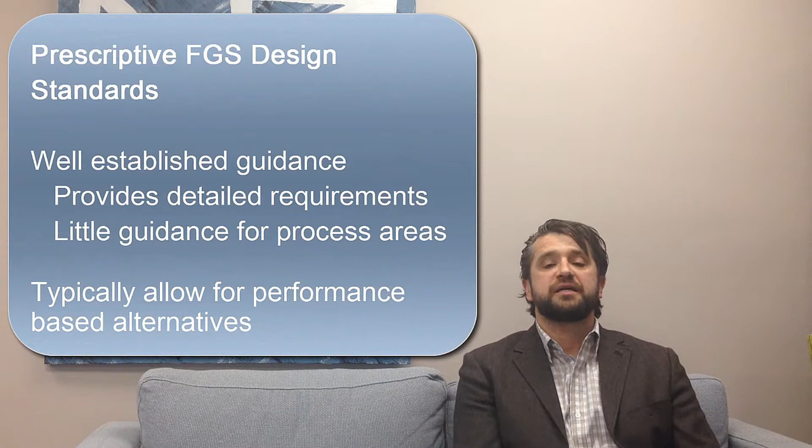But if you look at the prescriptive standards, even though they are prescriptive, they usually allow for the use of performance-based alternatives where appropriate. And of course, an open air chemical processing facility would be an area where it would be appropriate to use these measures instead of trying to apply the occupied building techniques that are detailed in NFPA 72 or EN 54. These standards, as I've mentioned, are generally not going to be specific to chemical processing facilities.

Performance-based standards, as I've already intimated, rely on an assessment of risk to develop performance targets, and those performance targets are typically going to be quantitative in nature. Historically, there have been no detailed standards for gas detection or fire detection with respect to placing detectors for open air chemical processes or oil and gas refining facilities. We've typically relied very much on expert judgment and rules of thumb to perform detector placement.

With the advent of the ISA TR84.00.07 technical report, industry and the experts on the ISA 84 working group have provided more detailed guidance for the design of fire and gas systems, and this design is going to be in accordance with the principles of the ISA 84 standard, or internationally the IEC 61511 standard.

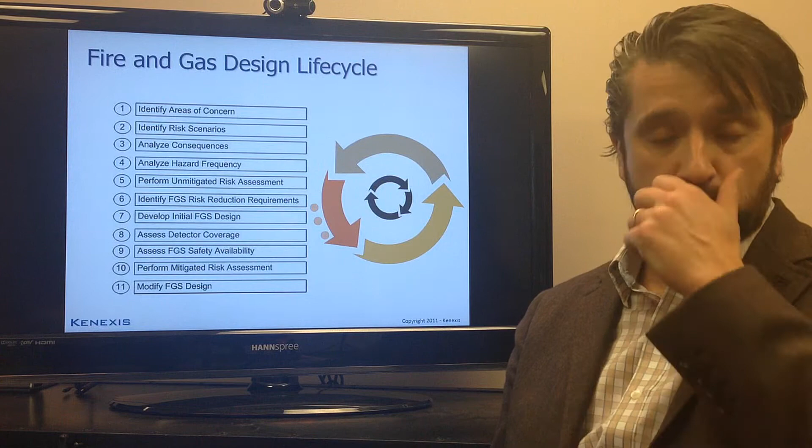What you see here is the fire and gas design lifecycle as it is presented in the ISA 84.00.07 technical report. You'll see that there are 11 stages in this safety lifecycle. And for those of you that are familiar with quantitative risk analysis methods, you'll see that it's very similar to what you would do in a QRA. This is not by accident, this is by design.

Myself and the other members of Working Group 7 of ISA 84's panel that developed this technical report had some knowledge, some grounding in how to perform quantitative risk analyses. And when we were tasked with the problem of how do you design a fire and gas system using performance-based methods, we fell back on what we were familiar with and what we knew, which is a full quantitative risk analysis.

Now, that being said, full QRA methods can, and in some cases should be used during performance-based FGS design, but most operating companies use more qualitative or semi-quantitative approaches similar to the level of effort of a LOPA, which we will get into as we spend more time discussing this topic.

So looking at the life cycle, we're going to begin by identifying the areas of concern. What are the leak sources? Where can leaks occur from? And those leaks can then ultimately result in fires. Then for each leak source, we're going to identify the risk scenarios, whether it's gas dispersion, toxic gas dispersion, flash fires, jet fires, pool fires. All of those different scenarios are going to be a function of the type of material being released.

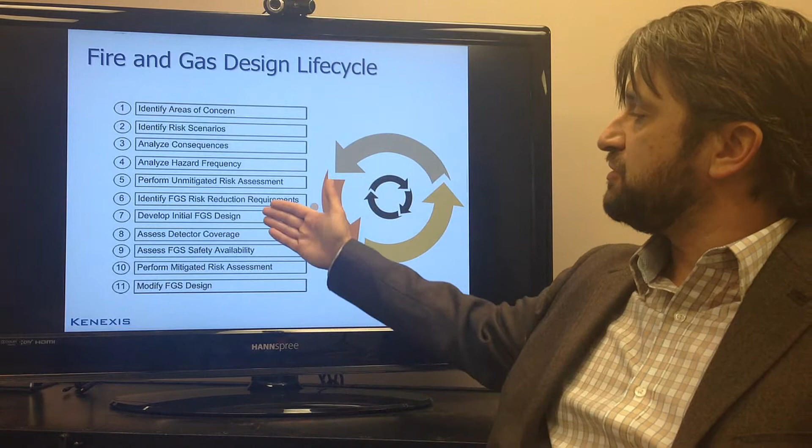So we're going to actually calculate what fraction of area or scenarios the existing or the proposed gas detection array or fire detection array can actually see, and then we'll calculate the safety availability using similar methods to ISA 84 technical report 84.00.02 that discuss calculation of probability of failure on demand. And using that information, we'll be able to perform a mitigated risk assessment, or what is the risk considering the beneficial effect of the fire and gas detection system.

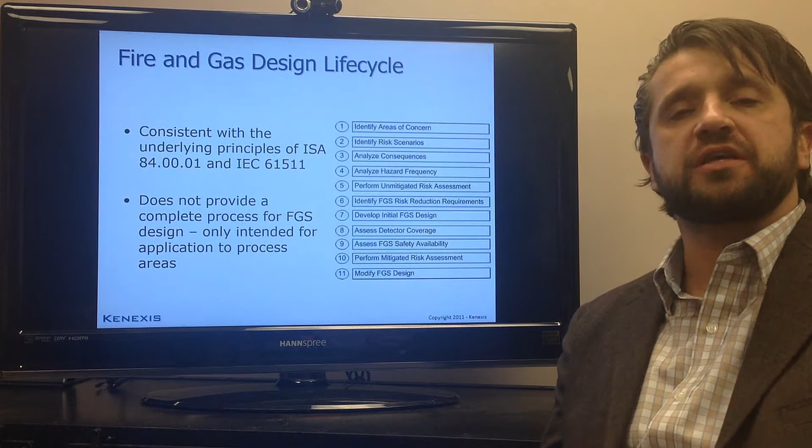Using the results of the detector coverage assessment and the safety availability analysis, we'll be able to perform a mitigated risk assessment here. Step 10. With the mitigated risk assessment, what we're doing is calculating the overall risk of the facility considering the beneficial effect of the fire and gas system.

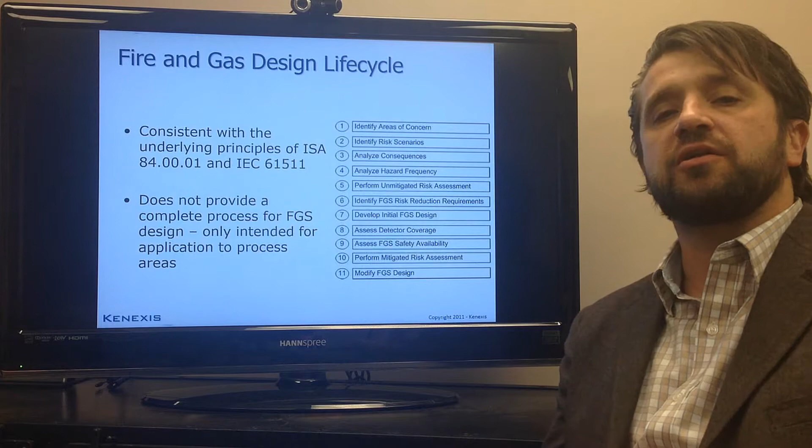If that risk is tolerable, then the design that we came up with is adequate. If that design does not achieve tolerable risk, then we're going to need to modify the fire and gas system design in an iterative fashion until it does achieve the tolerable risk level.

Now, the workflow that you would use for a fire and gas system design is going to be slightly different than the life cycle that was laid out in the standard. As I mentioned, when we first wrote the first version of the standard, performance-based fire and gas system design really was not done yet. It was not very prevalent.

There are several triggers that would cause you to do the analysis to determine whether or not I need a fire and gas system. After that, we're going to develop a fire and gas system philosophy. Now, that doesn't happen for every project. It's usually something that occurs kind of at the corporate level or at the plant level one time before any project work is undertaken. Now, on a project-to-project basis, where we're really going to start is the zone definition.

As I've mentioned, fire and gas system philosophy development is something that's going to occur once. It's not going to occur for every project, and it is going to occur more at the corporate level, the higher level, than down at the plants or for a specific project. This is important because you want to make sure that your fire and gas system design is going to be consistent from plant to plant to plant. A design changing different alarm colors or alarm horn sounds for different process areas within the same facility is not only counterproductive, it can actually be quite dangerous. So you're going to want to make sure that a lot of this information is going to be standardized.

So again, the philosophy development is something that occurs early on in the process, and it's going to be based on the risk tolerance criteria and HSE philosophy of your facility or of your corporation. And when you finish up with your fire and gas system philosophy, you're going to end up with a philosophy document and several procedures that you're going to use to implement fire and gas system projects.

A corporate fire and gas system philosophy will have many elements. And these elements are basically going to be broken into two categories. The first category being standardized methods, and the second category being standardized design heuristics or design procedures, rules of thumb. With respect to the standardized methods, the methods are going to relate to what are the processes and procedures that you're going to use to assess FGS requirements.

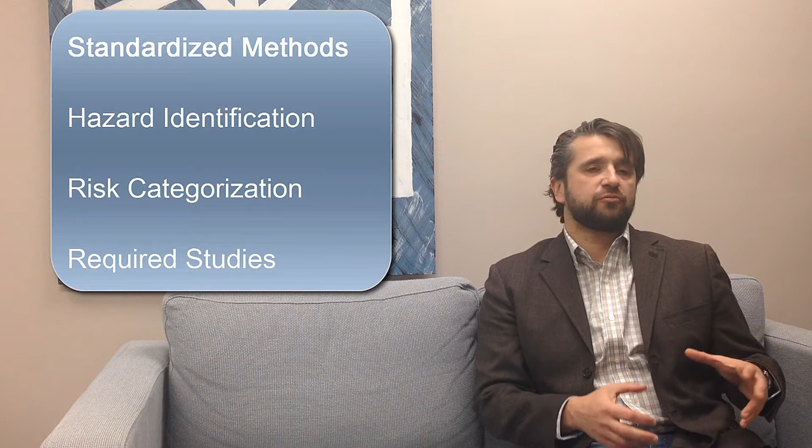So there will be criteria for how do you identify hazards, which hazards are present that you need to design for. There will be criteria for how you categorize your risks. So the level of risk associated with a high pressure gas compression unit is going to be higher than the risk level for atmospheric diesel storage, for instance. So procedures to determine which risks are higher and require more safeguarding. And then there will also be requirements for what type of safety analysis you're going to perform and what are the actual studies that need to be performed and how are those studies going to be executed.

With respect to design heuristics, these are going to be criteria that you design your system to. So there will be criteria for how do you do zone definition and how do you do grading. How do you assign performance targets to your fire and gas system equipment?

There will be criteria for determining what type of detectors do you use. When do you use UV versus IR versus triple IR versus CCTV technology? There will be criteria for setting what the alarms are. So when do you alarm? Low alarms, high alarms, what are the settings for those alarms?

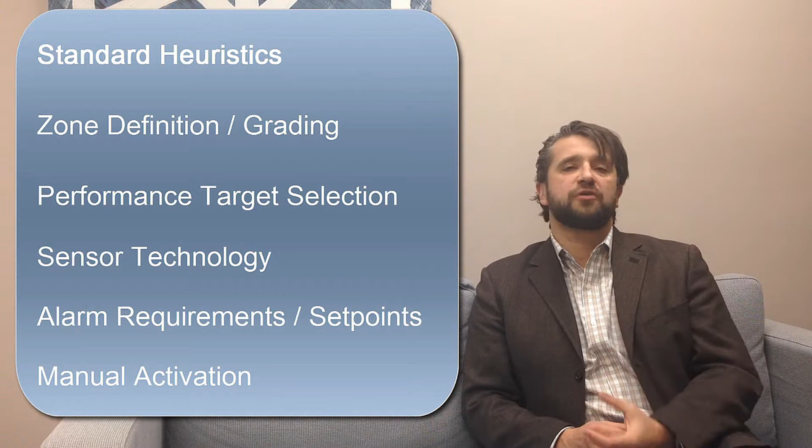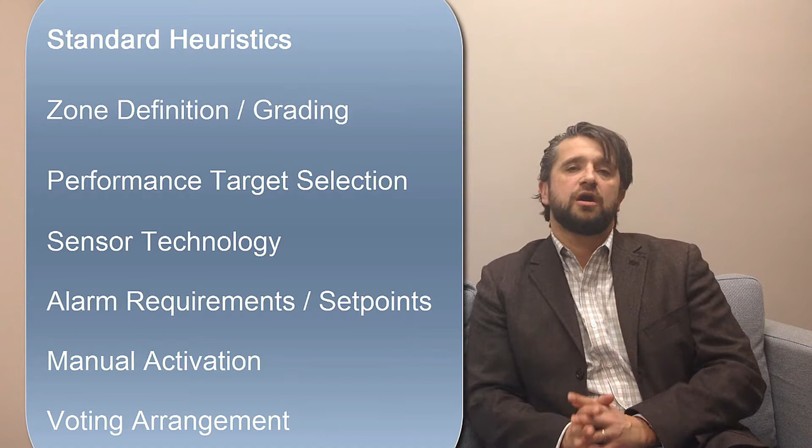There will be requirements for manual activation. Where do you put your MACs, your manual alarm call points? How many do you need in a certain location? There will be requirements related to detector voting and how that voting is impacted with respect to alarming and also with respect to executive actions being taken as a result of activation of fire and gas detection equipment.

And finally, there will also be criteria for set point selection. So there will be different set points typically for low alarms, for high alarms, or high-high would be more technically correct, even though the industry jargon generally says low and high alarms. And then also even higher alarms or different alarms that indicate that executive actions need to be taken if that is going to be part of your fire and gas system design.

All of this information is something that needs to be decided upon and agreed upon ahead of time by all of the stakeholders in the fire and gas system, from operations to instrumentation and control to the safety department. After you've completed your FGS philosophy documentation, you should have a set of several procedures that you're going to be able to use for designing your FGS.

Some of the important ones are going to include procedures for hazard identification. So what tasks are you going to do to identify where there are hazards and what types of hazards are present in any particular zone? There will be procedures for zone definition, defining different areas as zones, and also grading, or the risk analysis process that you're going to use to determine what is the criticality level that is going to then result in performance targets for those different zones.

Performance target selection, again, detailed procedures on how do I determine what is the coverage and safety availability that's going to be required for a certain zone. And then you're also going to need procedures for how do you quantitatively verify that you've achieved the performance targets that were specified in the previous step in the FGS safety lifecycle.

The next step in the FGS design lifecycle is the step of zone definition. When we're going to define zones, we're going to want to start with documentation about the facility. So things like process flow diagrams, piping and instrumentation diagrams, plot plans. Plot and deck plans are critical because this is a geographic exercise, so we need a geographic description of the facility, and also other documentation like cause and effect diagrams if they're already available.

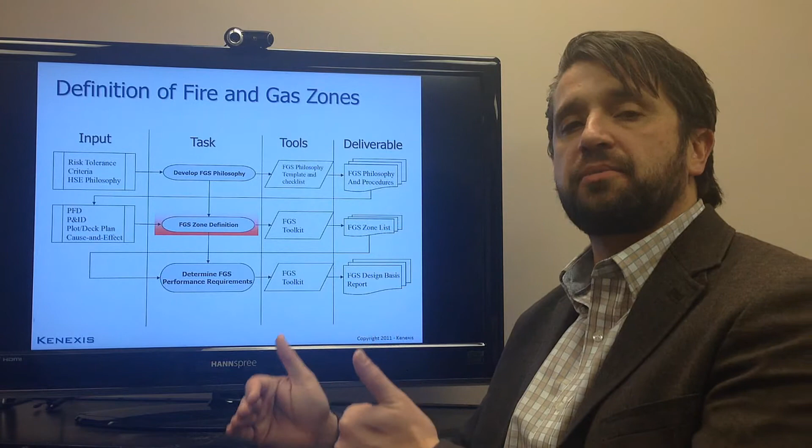We're then going to use a toolkit process and end up at the end of this zone definition step with an FGS zone list. And that list of zones is what we're going to use for each of the subsequent steps in the project to determine what the requirements are for each individual zone. Zone definition is an important part of the FGS safety lifecycle. The zones are going to be kind of equivalent to safety instrumented functions in safety instrumented system design. They're the basic unit upon which risk analysis is performed.

There are several different types of zones, and depending on what the zone is, that will also determine what type of analysis is performed and what requirements end up getting placed on those different areas. So for instance, a living quarter would be an occupied type of zone, and for that zone you wouldn't need to do fire and gas mapping. You could simply follow NFPA 72 requirements. There might be another type of zone which is a process area zone, and in process area zones you can't really fall back on the prescriptive standards, and you're going to need to use more of the performance-based techniques.

And then there are other types of zones that are kind of intermediate, or what we call separation or segregation zones, where you have an interface between an unprotected area and a protected area. So a great example of that would be an air duct or an air inlet that's going to bring air into a room that has unrated electrical equipment such as motor starters. You're going to want to have a certain set of requirements on gas detection equipment that are going to prevent air that contains hydrocarbons from being pulled into that room with unrated electrical equipment.

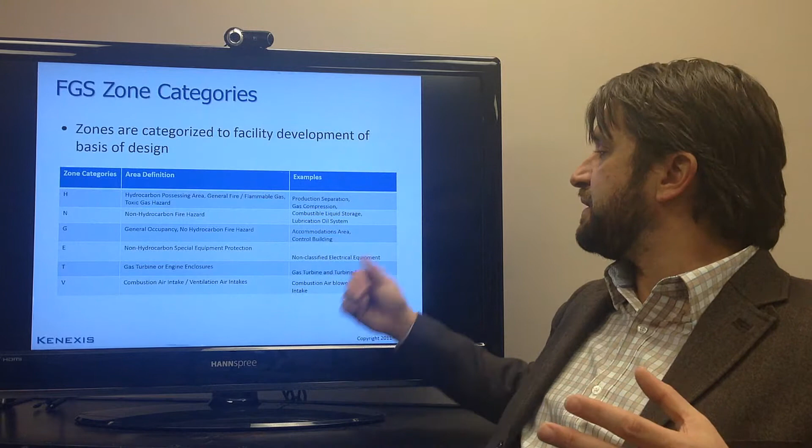A type E zone is going to be special equipment that needs protection. For the type E zone, the best example I would give you would be non-classified electrical equipment. So the motor control center of a facility could be rated a type E zone. A type T zone is kind of a special area. These are going to be enclosures of the drivers of rotating equipment. So gas turbine enclosures, engine enclosures, all have special requirements. A lot of these requirements are going to come from the equipment vendors that provide these types of pieces of equipment.

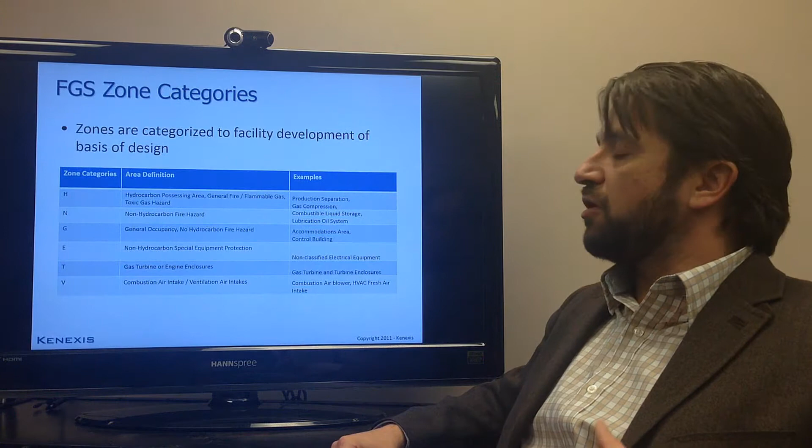And the last one commonly used is going to be the V-type zone, which is going to be your air intakes, whether that's ventilation air into a building or combustion air into a piece of fired equipment. Those zones also typically are going to be more prescriptively designed than performance-based design, because the attributes of the zone are well known enough to where prescriptive rules usually can be employed very effectively.

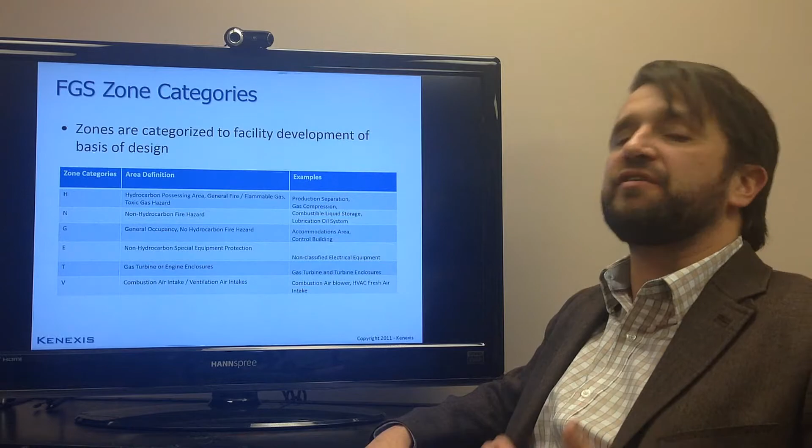Historically, we've divided facilities up into zones because that's established different requirements and also allowed for good reporting of locations of hazards, fires, or gas releases that are occurring. But with the advent of performance-based approaches and the ISA 84.00.07 technical report, we have also added performance targets.

So this is something that's new, that hasn't been done previously, and as a result, it's an area where there are a lot of questions about how to perform these different tasks, because these tasks are generally outside of the field of expertise of your typical fire and gas system engineer, kind of heading more toward an HSE role or a quantitative risk analyst role.

So when you're determining the FGS performance targets, and again, those targets are going to be both coverage and safety availability, we're going to start by using our FGS philosophy and the procedures contained in those philosophy documents that are going to tell us how to perform the fire and gas system performance target selection. We're probably going to use some sort of toolkit, whether that's a software tool or just referring back to tables in a procedure to assist us in this task.

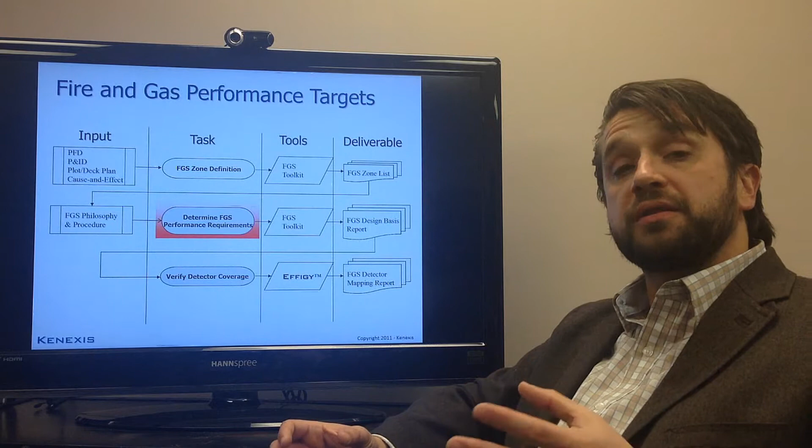And at the end of the task, we'll have an FGS design basis report that's going to add to that zone list that we created in the previous step. And for each one of those zones, we will assign performance targets either to the zone as a whole or more commonly to every major piece of equipment that resides in that zone.

In order to obtain the performance targets for a fire and gas system, you're going to need to model the risk. And there are some requirements that your risk modeling process needs to consider. You need to develop a risk model that is sensitive to two things: the two performance metrics of the fire and gas system, that being the detector coverage and also the safety availability or the probability of failure on demand of the electronics of the fire and gas system.

Now, the analysis is also going to need to consider all of the attributes of the loss of containment of a flammable or toxic material. So you're going to need to consider what type of equipment am I using in my facility. That's going to tell you something about what the leak rates are. You're going to need to consider, well, what are the range of consequences that can occur if the material is released? How likely is that release? This is another important attribute.

And then some other things are going to define the risk, like what is the level of human occupancy in any particular zone? What is the probability that a release will be ignited? And in some cases, you may also want to consider the production value of a process, or what is the financial loss associated with a loss of containment event.

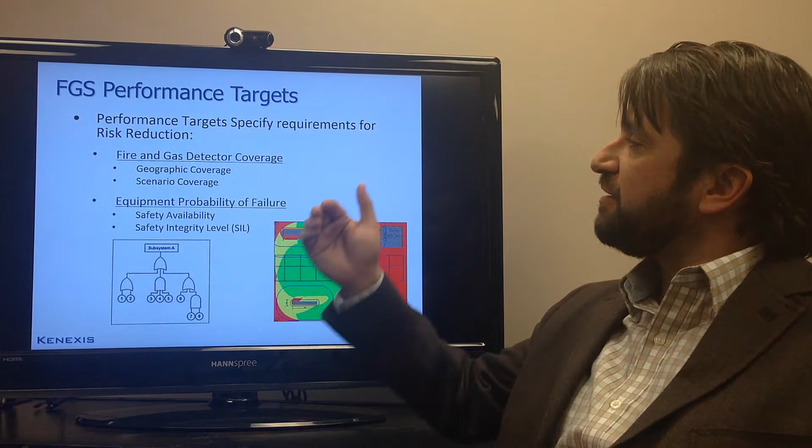Regardless of the type of methodology used, the performance targets are going to be the same. Again, there's going to be coverage and there's going to be safety availability, which is an analog of equipment probability of failure. For fire and gas detector coverage, there are two types, which I will define in more detail later in this presentation. Those two types are geographic coverage, which calculates the fraction of a certain area or volume that is covered by a given array of gas or fire detectors.

And then there's scenario coverage, which looks at what is the percentage or the fraction of the release scenarios that are detected by that detector array.

It's a subtle difference, but it's quite important. When you're looking at semi-quantitative approaches, you're probably going to use geographic coverage because it's quicker and easier to calculate, whereas the full QRA approaches require you to use scenario coverage.

Now, on equipment probability of failure, we use safety availability as the term in the 84.00.07 standard. The safety availability, again, is very well correlated to SIL, but the working group that wrote the technical report, myself included, felt that using SIL on a fire and gas system is not really appropriate because there are a lot of qualitative aspects and attributes of a safety integrity level that really don't fit very well with a fire and gas detection and suppression system.

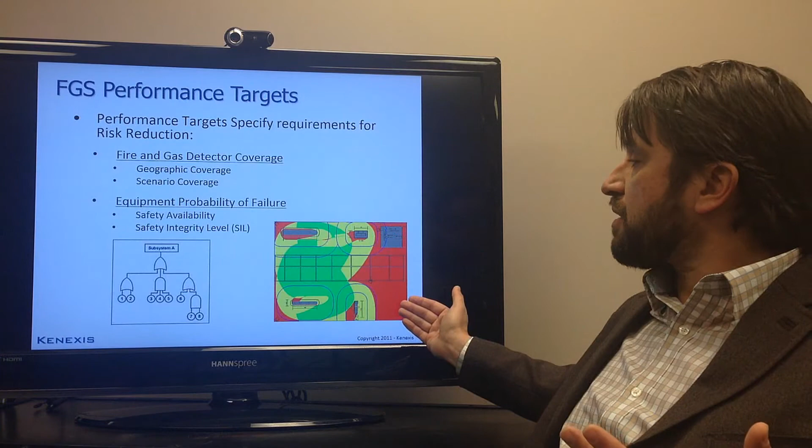So for probability of failure on demand, you might use whatever SIL calculation methods that you currently use, whether that's fault trees or Markov models or simplified equations. And then for coverage, and what you see here is an example of geographic coverage, you're going to need to perform calculations, usually using computer-aided tools, but it is possible to do this type of analysis manually, using drawings, and I'll explain that a little bit later in the discussion. But this type of analysis is what we're going to use to verify that the coverage has been achieved.

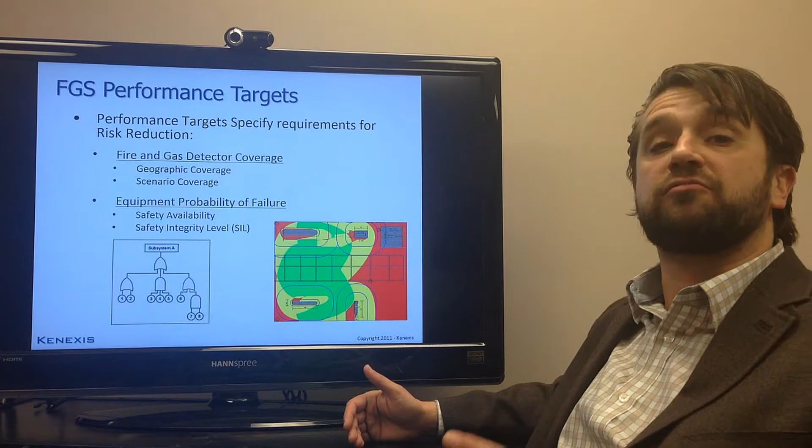I'm going to explain the fully quantitative approach to FGS performance target selection first. And that's because in order to really appreciate the semi-quantitative method and understand why the semi-quantitative method can deliver similar results to the fully quantitative approach with significantly less effort, you need to really understand first what occurs in the fully quantitative approach and then how shortcuts are taken to represent what occurs in the fully quantitative approach for the semi-quantitative approach.

In fully quantitative analysis, again, a full QRA, full quantitative risk analysis used to select fire and gas system performance targets, we first need to characterize the consequences of a release of material from process equipment. We're going to do that through dispersion and consequence modeling. Sometimes we'll use similarity models like PHAST from DNV. In other cases, we may want to use computational fluid dynamics to more accurately characterize the releases, especially in situations where the releases occur indoors, where the size and direction of flow of the gas cloud is going to be more dependent on mechanical ventilation than on the characteristics of the plant or the weather conditions.

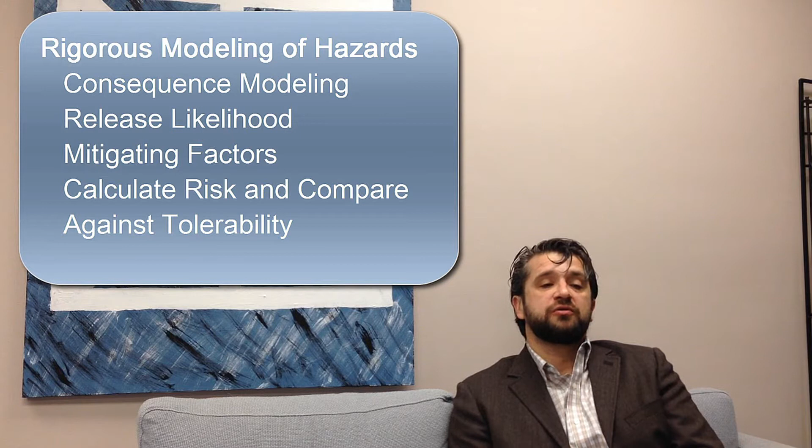We're going to look at release likelihood through an equipment failure rate database. More on that later. We're going to look at mitigating factors that vary from site to site that are going to impact the magnitude of a consequence given a release has occurred. Things like probability of ignition, degree of congestion and confinement. And after we do all of that modeling, we're going to calculate the overall risk of the zone and compare that against tolerability criteria.

The design criteria then are going to be iteratively modified in order to achieve the tolerable risk target. So we'll run the calculations for the first case. If we don't achieve tolerable risk, then we'll need to add detectors, move detectors, and so on until tolerable risk is achieved. This analysis for the full quantitative approach is going to necessarily be based on scenario coverage and safety availability. Geographic coverage is a shortcut approach that is going to be very useful for the semi-quantitative approaches, but when you're doing the full QRA, you need to actually look at individual scenarios.

The full QRA approach starts with hazard scenario identification. So what we would need to do is look at a zone, look at all of the release points, and then determine all of the credible scenarios. So for each vessel, piping, flanges, instruments, instrument connections, wellheads, pumps, compressors, exchangers, launchers, receivers, risers, pipelines. The list goes on and on of all the types of equipment that you would need to consider in your zone. So those are the release points.

And then for each release point, we're going to need to look at the factors that are going to affect the release size. So we'll consider potential hole sizes in the equipment that the leak is occurring through, the location and orientation of the equipment and the release, the phase of the release, whether it's gas, liquid, or a combination of the two, the degree of toxicity of the material if it's toxic, and the occupancy of the zone.

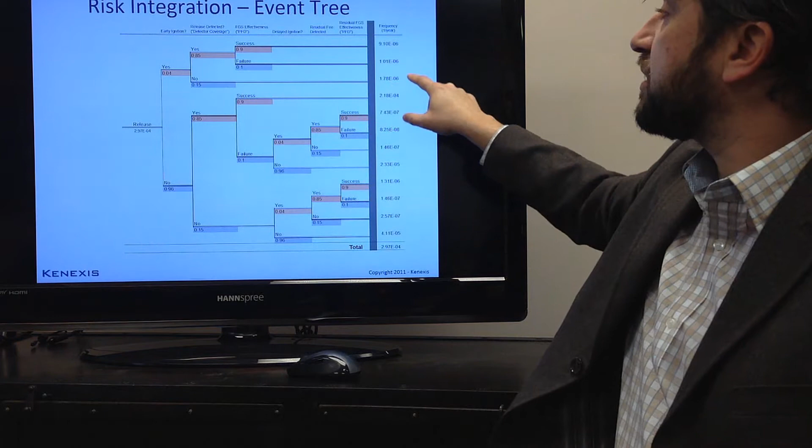So let's say we wanted to know what is the frequency at which there is a release with an early ignition, which means we're going to start with a jet fire, but that release is not detected by the gas detection system or the fire detection system because there isn't a fire detector in the correct location. And that would be down this no branch. So in order to calculate the frequency at which that occurs, we will take the release frequency, multiply it by the conditional probability of early ignition, multiply by the conditional probability that the release is not detected by the fire detection equipment to calculate the overall frequency of that branch. Okay.

Each one of these frequencies will then result in a certain consequence level. So a branch might result in multiple fatalities, single fatalities, injuries, serious injuries, and so on. What we then need to do is to sum up, and again, this is a little bit of a simplified discussion. Typically, you would see rows for fatalities, injuries, serious injuries, and so on. What you would need to do then is to sum all of the frequencies. In this case, we're just going to sum all of them together to determine the overall frequency for a certain type of outcome. And then you can take that number, so let's say 2.97 times 10 to the minus 4 was the frequency of fatality.

You would then take that number and compare it against your tolerable risk target, possibly 1 times 10 to the minus 4, and then you would see that the actual frequency is greater than the tolerable frequency, so something needs to be changed in order to make that level of risk tolerable. And the numbers that we can change in order to make the risk tolerable are the release detected, or the detector coverage, and the FGS safety availability numbers. So you can manipulate those two numbers until the tolerable risk level is achieved. And in that way, you'll be able to establish those two critical performance targets for your fire and gas system.

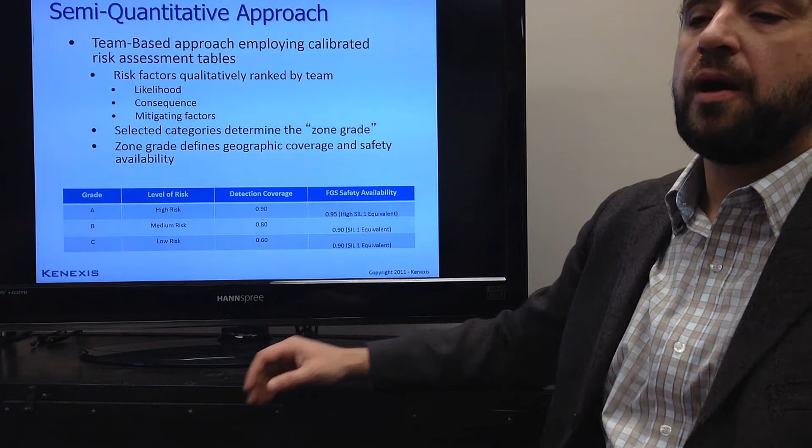Now the process that you would use to both create the tables of risk factors and the grades associated is something that your company is going to need to develop itself, but we do have some good information to get you started. So if you look at the Kenexis Fire and Gas Systems Engineering Handbook, which is available from Kenexis on request for a printed copy, and we can also provide you an electronic copy. You can just download that from our website.

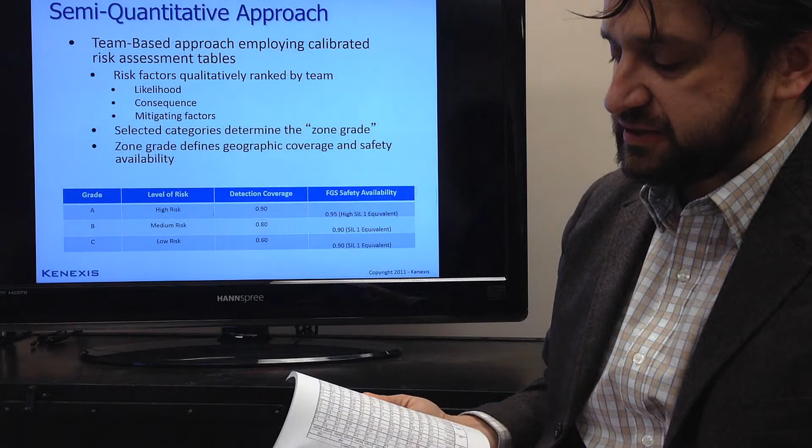You'll see that we have a sample categorization process contained inside the document, including flow charts and the different tables. So we have a starting point for you to use in this book, but again, I would highly recommend that each organization does its own calibration to make sure that these targets are going to allow you to achieve tolerable risk.

Now, I'm sure a lot of you that are familiar with quantitative risk analysis are looking at the simplified approach saying, wow, you're talking about orders of magnitude less work. You could probably run through those semi-quantitative worksheets with a single engineer who has data. You probably don't even need a team, and you're going to do it in minutes, whereas the full QRA approach could take hours or days to develop the same amount of work.

And it's great that you have all these tables with the scores, but how do I know that the numbers in the tables that developed the targets, the targets themselves associated with the different grades, how do I connect the dots between what's in those tables and what is actually truly tolerable risk? Because just looking at the semi-quantitative approach in isolation, you would have to say that there's no correlation between that approach and quantitative risk. It's all kind of subjective. You just picked some numbers. Well, the truth is we didn't just pick numbers, and that brings up the very important topic of calibration.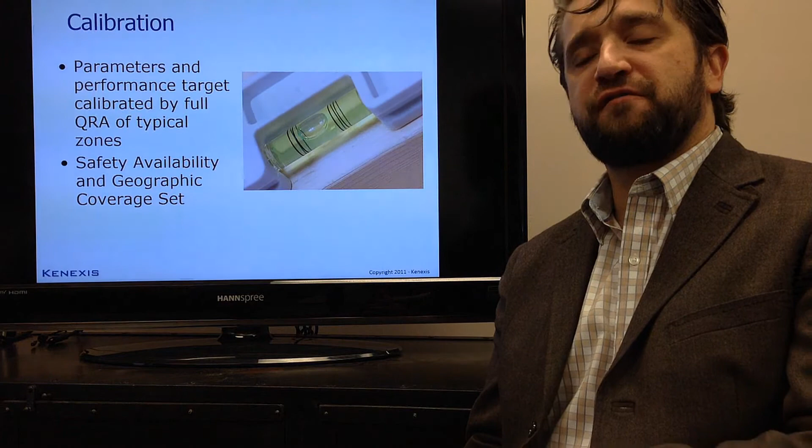And again, that's why I discussed the fully quantitative approach first instead of just describing the semi-quantitative approach. For the fully quantitative approach, you actually do achieve tolerable risk. In the semi-quantitative, you're picking numbers that are giving you scores that are going to result in targets, and you simply have to have faith in the semi-quantitative approach that it's actually going to achieve tolerable risk. Well, in reality, you don't have to have faith as long as you have done a proper calibration.

So what a calibration does, giving you the overview, is the first step is to start with a semi-quantitative approach that has tables for risk parameters and tables for zone gradings, and then perform an analysis using that semi-quantitative approach. But you don't stop there. You also take those zones.

So you would pick some typical zones that are typical of your production environment. If you're an oil and gas producer, you might do some wellhead zones, some separator zones, some gas compression modules, maybe one of each, and run it through the semi-quantitative approach, but then also run those same exact zones through the fully quantitative approach. So you're going to analyze those zones two different ways, once fully quantitative, once semi-quantitative.

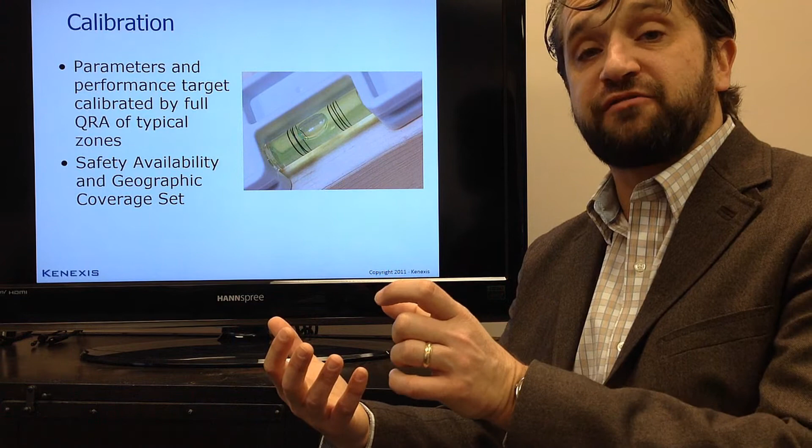For an uncalibrated procedure, they're probably not going to result in the same answer in both cases. If they don't, and usually as a starting point they don't, then you're going to need to go back to your semi-quantitative approach and make adjustments. You'll need to adjust the ranges inside the risk factor tables, and you'll need to vary the performance targets in the different grades. And you're going to need to keep doing that until consistently the semi-quantitative and the fully quantitative

provide the same results. At that point in time, you can consider your semi-quantitative approach to be calibrated to achieve your tolerable risk profile. And the reason it's important for each company to do this individually is because operating parameters vary from facility to facility. Some facilities are built with more risk than others inherently. And also, different operators are willing to accept different levels of risk in their operations.

So each individual operating company should really have their own calibrated semi-quantitative procedures. What's in the Kenexis FGS Engineering Handbook is a good starting point. It has been calibrated to some generic industrial norms, but we highly recommend that each company do their own calibration.

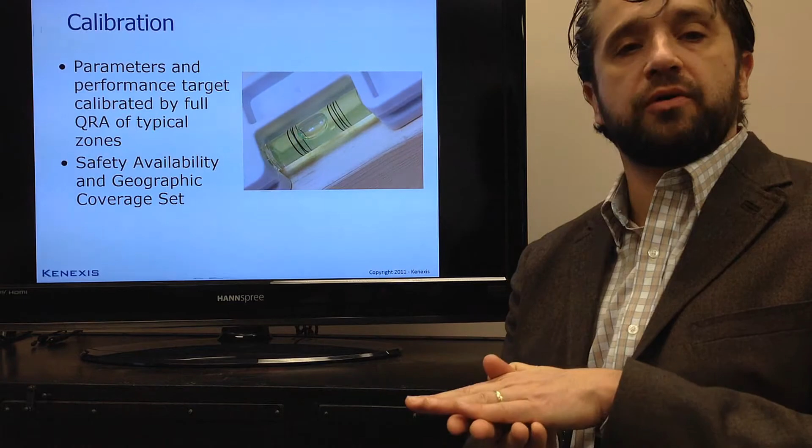Another important attribute of the semi-quantitative approach is the extents of graded area concept. One of the weaknesses of not only the semi-quantitative approach, but also just geographic coverage in general, is that you're not really considering where the leaks are coming from when you're deciding where to assign your coverage, your gas coverage or your fire coverage.

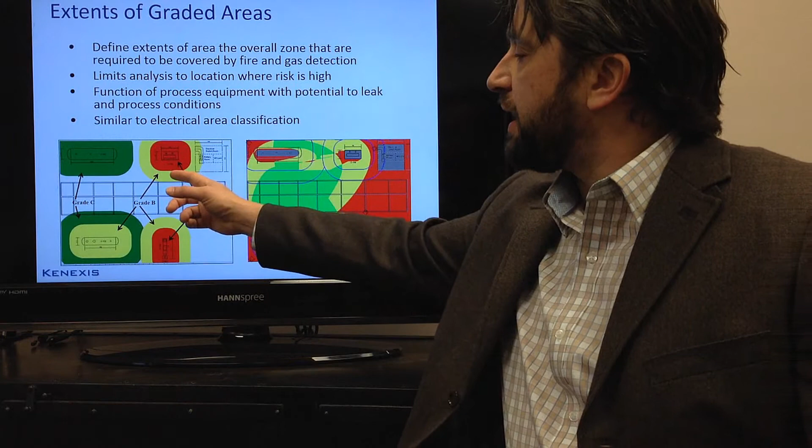And then for that piece of equipment, we would set off a certain distance away from that piece of equipment to be required to be covered to that grade. So if you look at this compressor, the area that's shown in red around the compressor would be grade A because that's what was selected. And then also an area around that would be a lower grade.

So if you think about it, this is very close to electrical area classification, where you identify all of your leak sources and then you'll have a certain standoff area away from that leak source, where in the case of electrical area classification, it would define the ratings of the electrical equipment.

In this case, it would define the coverage that a fire detector array or a gas detector array would need to provide for that piece of equipment. So this allows us to really focus on the areas where the risk exists and cover lesser risk areas with lower rigor, and potentially even not cover areas that don't have any risks associated with them.

So you'll see the grading map on the left-hand side. On the right-hand side, you'll actually see an effigy fire detection map for that same facility, with the blue lines representing the edges of the different grades, and the map itself. Red means that there's no coverage, yellow means that one detector covers that area, green means that two or more detectors cover that area. And in this way, you can calculate the numerical coverage for each of the different grades inside the zone to make sure that the coverage is acceptable.

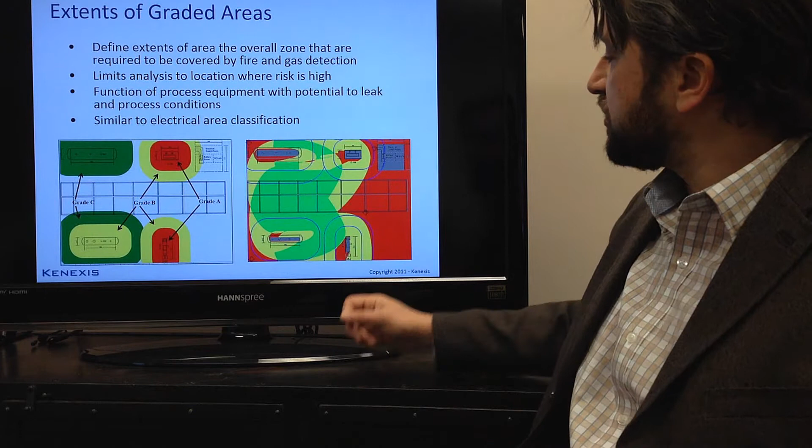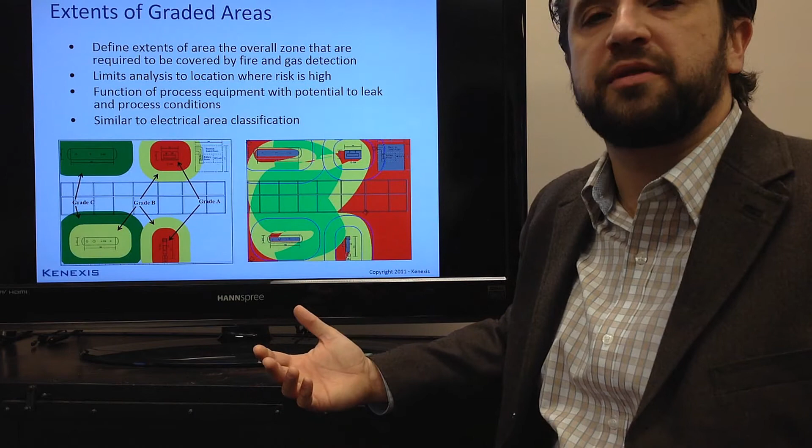So you'll see here that this giant area of red is not covered at all, but also it's not graded. So that's okay. It's not graded because there's no equipment there that's going to form a leak. So the extents of graded area concept is what allows the semi-quantitative approaches and the geographic coverage to more accurately place detectors in areas where the leaks are actually going to be occurring, as opposed to a fully quantitative approach where you're looking at scenarios, and there you're actually looking at the extent of a release. But again, that scenario coverage and fully quantitative performance target selection is a lot more time consuming and typically not done by a lot of operating companies at this point in time.

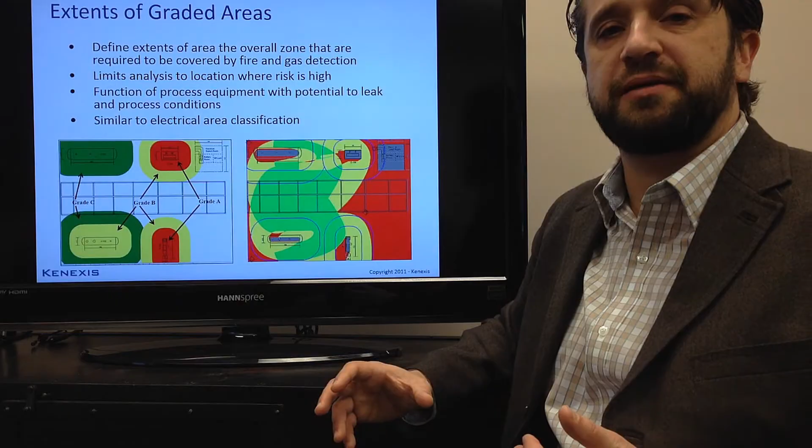After performance targets have been selected, the next step is to verify that the coverage target has been achieved by the actual fire detector array or gas detector array. In terms of verifying detector coverage, we're going to start with the philosophy and procedures that have been developed to allow you to achieve coverage, and then we'll perform that task using usually some sort of computer modeling tool that will run the coverage calculations. But again, that can be done manually. The manual methods have, shall we say, a significant degree of inaccuracy associated with them. But then again, even the manual methods are going to be a dramatic improvement over simple rules of thumb or expert judgment.

At the end of the detector coverage step, you're going to have a fire and gas detector mapping report that's going to include for each zone a map that will visually show you what coverage is achieved, along with numerical criteria that define numerically what the coverage is that has been achieved, and a comparison of that coverage against the targets. Verification of detector coverage is a new attribute in performance-based fire and gas system design. Quantitative verification that coverage targets have been achieved is a new and integral part of the ISA 84.00.07 technical report and the lifecycle for performance-based fire and gas system design.

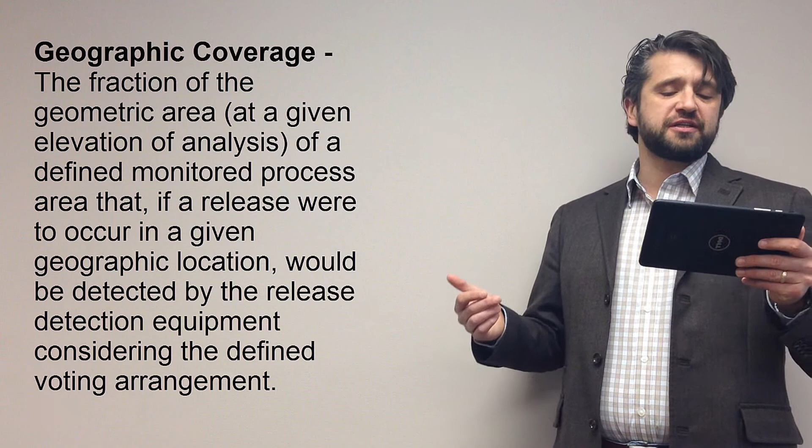The ISA 84.00.07 technical report on performance-based fire and gas mapping defines two different types of fire and gas mapping, those being geographic coverage and scenario coverage. For geographic coverage, the definition is the fraction of the geometric area at a given elevation of analysis of a defined monitored process area that, if a release were to occur in a given geographic location, would be detected by the release detection equipment considering the defined voting arrangement.

Simplifying that, if you consider the floor space of an area to be the elevation of analysis, what you'd want to know is what fraction of that floor space can be seen by the fire detector array or the gas detector array. For geographic coverage, it's much, much easier to calculate because all you need to know are the performance attributes of the detectors and their locations and orientations, and also the locations of the obstructions. The actual releases are not relevant to the geographic coverage process because you're only detecting what can be seen as opposed to what can occur. In order to know what can occur, now we need to look at scenario coverage.

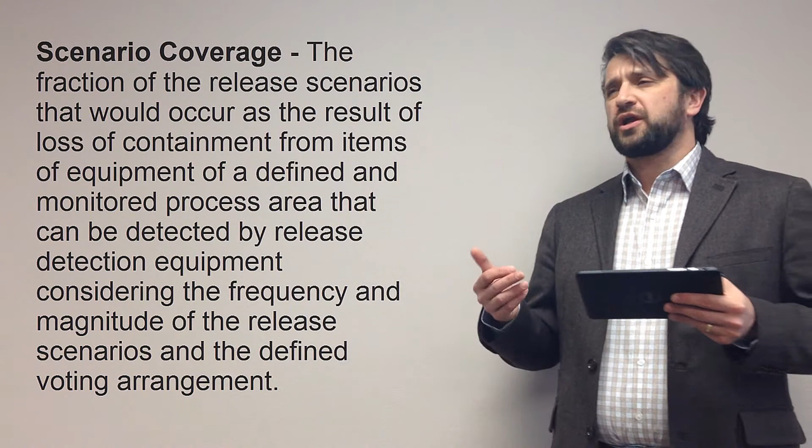Scenario coverage is the fraction of the release scenarios that would occur as a result of the loss of containment from items of equipment of a defined and monitored process area that can be detected by release detection equipment considering the frequency and magnitude of the release scenarios and the defined voting arrangement. So for scenario coverage, we're going to look at those hundreds of thousands or millions of gas clouds that we calculate during the full QRA type of approach.

For each one of those gas clouds, we're going to compare it against the fire detection array, gas detection array, and determine whether or not that scenario can be seen. If it can be seen, we take its frequency and consider it to be detected. If it cannot be seen, we take its frequency and consider it to be undetected. We then go through every one of all of those scenarios and do a summation to calculate what is the overall fraction of the release frequency that can be detected.

FGS detector mapping can either be performed manually, or more commonly it's done using computer software. Either way, the process is roughly similar. The starting point to the process is to look at the performance of a specific detector. The performance attributes of different detectors, especially if you're looking at something like an optical fire detector, are going to be based on FM approval testing data. There is an FM 3260 standardized test that will create a cone of vision for a fire detector, such as what you see on the right-hand side here. So for this particular equipment vendor, you'll see that there are 3 separate cones of vision for maximum, medium, and minimum sensitivity.

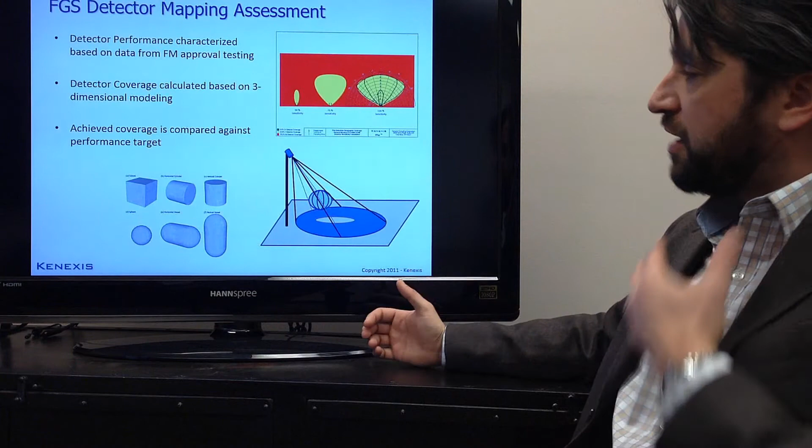So if you look here at this particular figure, you'll see a spherical obstruction in the path of an optical fire detector, and you'll see that that obstruction is essentially going to cast a shadow on the elevation of interest. And that shadow needs to be removed from the footprint for purposes of calculation of the coverage achieved. So this three-step process is essentially what needs to occur in order to perform the detector mapping assessment.

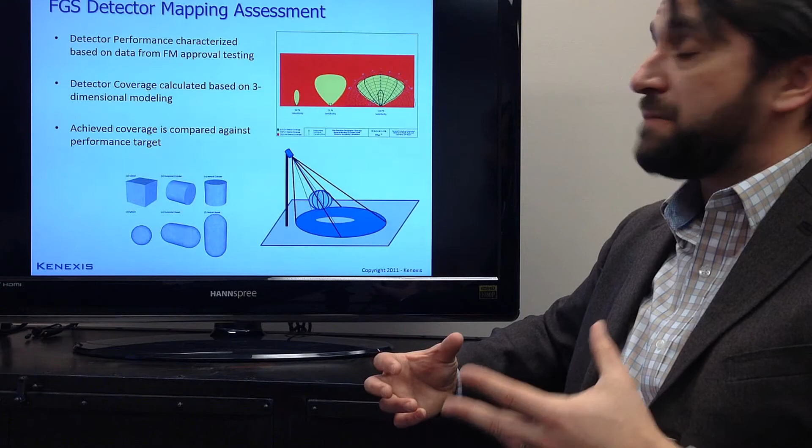Anything that's yellow means only one of the detectors in that zone can see that location. And anything that's shown in green means that 2 or more detectors can see that location. And again, this is geographic coverage, where we're only concerned with what the detector can see, and we're not so concerned with where the releases or the fires are actually occurring.

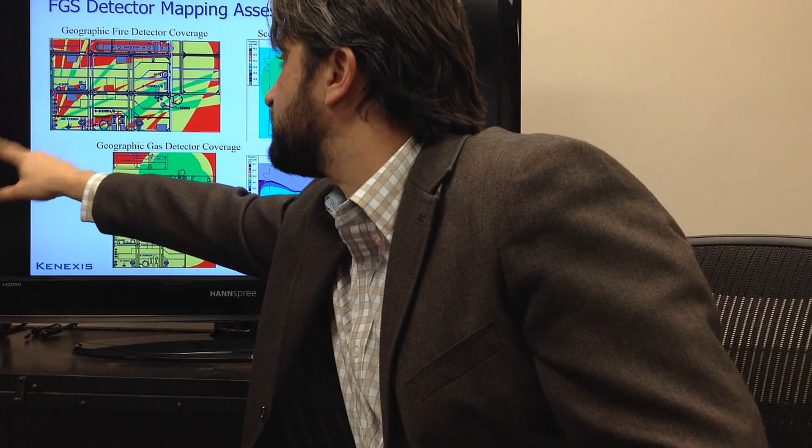The top is for fire detectors, and based on years of experience looking at these maps, I can tell that this map is drawn by two detectors. One detector is located here and it's pointing in that direction. The other detector is down toward the bottom and pointed up. So that's fire detector coverage. Gas detector coverage can be done similarly. Again, red meaning no detectors can see that location, yellow meaning 1, green meaning 2 or more detectors can see that location.

Now for gas detector geographic coverage, we're interested in a certain diameter sphere of gas cloud. And the determination of the sphere size that is of interest is a rather complex topic that's covered in the ISA EC56 training class that was developed by Kenexis. But basically, the most simplified version would be that we're going to try to detect a gas cloud that is of a size significant enough to cause damage to a facility. Depending on the attributes of the facility, that's either going to be 5 meters in diameter or 10 meters in diameter.

So what we do in the mapping is we'll essentially look at a point on the map, say down here in the red, and say, well, I want to detect a gas cloud that has a 5-meter diameter. If the center point of that gas cloud was at this location, would there be a detector in its path that would detect that that gas cloud exists? And everywhere that you see in red, the answer is no. Where you see yellow, that means at least one detector will see it. Green means 2 or more.

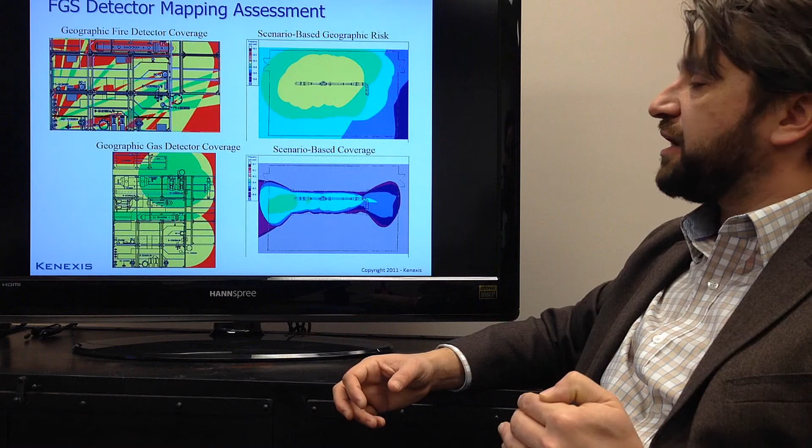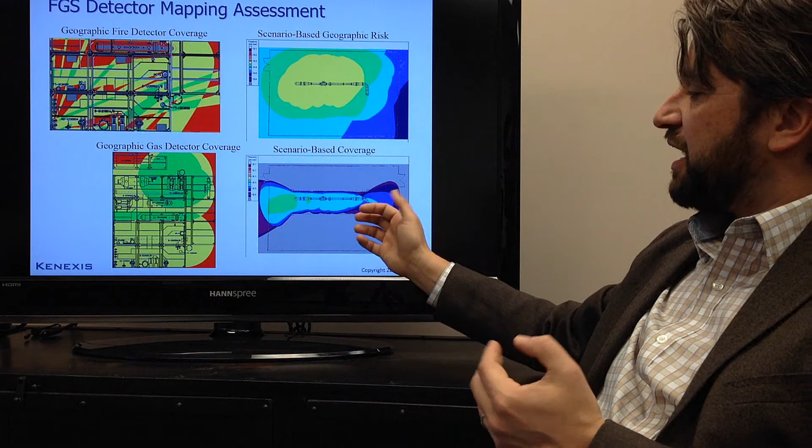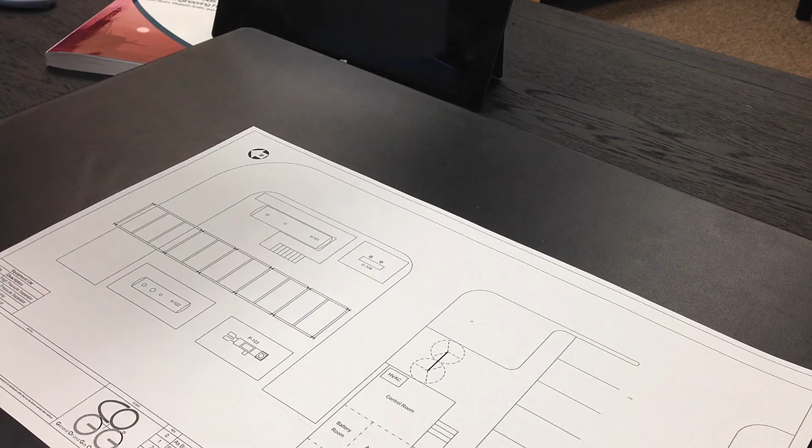Fire and gas mapping studies can be done manually, but manual methods are going to be subject to the errors that we've already discussed. If you wanted to do a fire and gas mapping study manually, let's start with a fire detector study. You'd begin with a plot plan of the facility, such as the one seen here, which is the plant from the Kenexis training class. And after you get the plot plan of the facility itself, you will need to get a plot, essentially, a cone of vision drawing of the detector of interest.

Now, you're going to need to make sure that the scale of the plot plan and the scale of the printout of the cone of vision of the detector is the same. Then, after you get your printout, simply use your kindergarten skills and cut the cone of vision out and use it as a template.

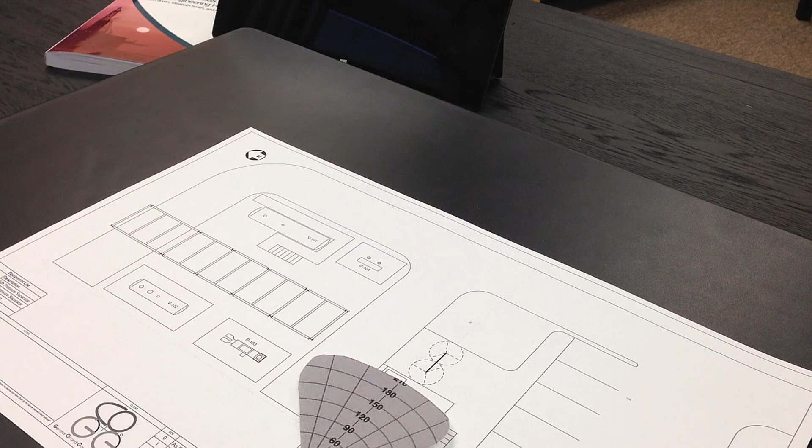So we will start with our template of our cone of vision there, and then we will pick the location where we want to see a detector. So let's say we wanted a detector in this location. We would simply take that cone of vision and trace it onto the plot plan, like so.

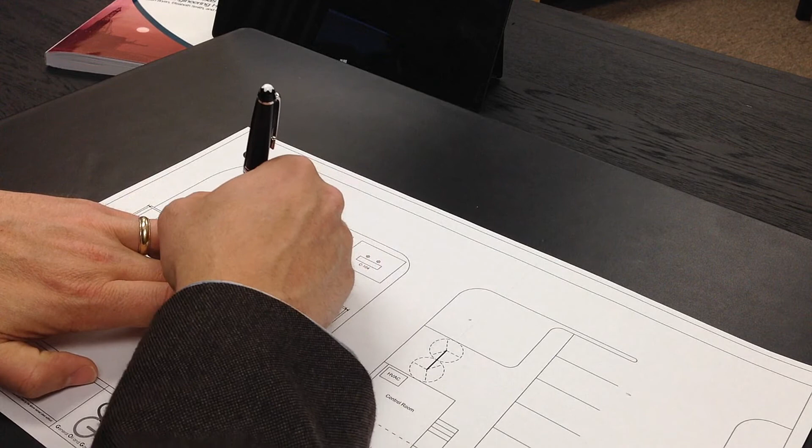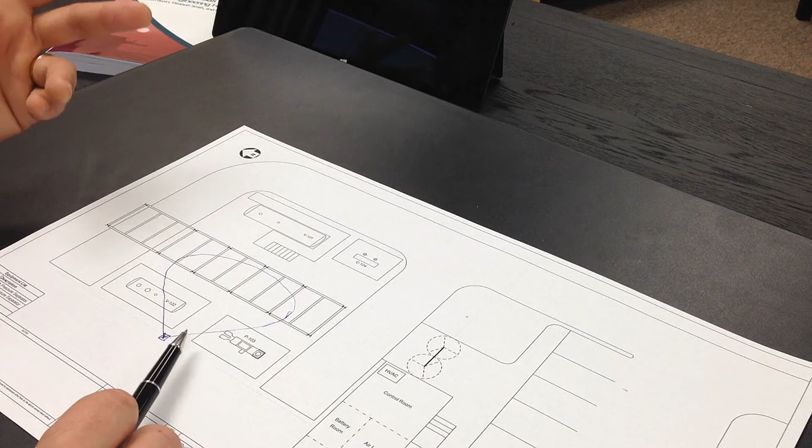And again, we would then do that for as many detectors as we would want to put on the facility. So in this case, there's only the one detector, and it's pointed in this direction. So that's the view of the detection. And again, the error is going to be because the cone of vision has not been tilted into 3 dimensions. But again, it's better than not doing any mapping at all.

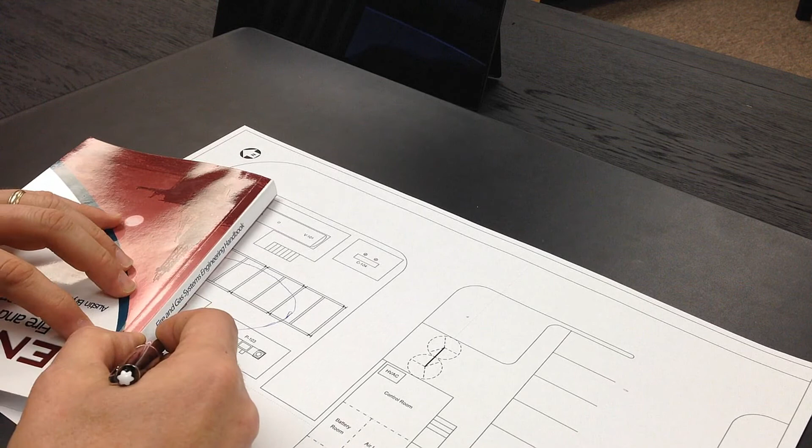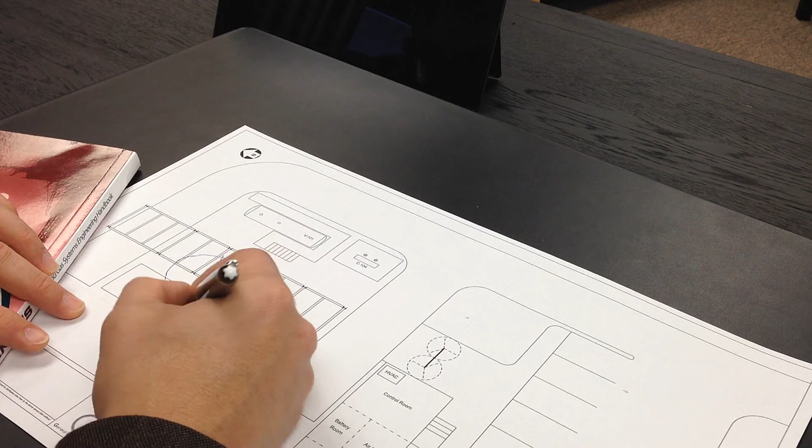Now, in addition, you will need to do some analysis of the obstructions. And in order to analyze the obstructions, you'll want to take a straight edge and go from the point of the detector through the edge of any obstructions and create a line segment. So from here back, this area gets dropped out of the coverage. So only this portion of the area is what we know is going to be covered.

Now, if you wanted to be a little bit more sophisticated, you can do some math and calculate a distance, use just traditional trigonometry to calculate the distance at which the shadow that is cast by this piece of equipment would cross the plane of interest, because we would expect that because the detector is located in an elevated position, it will be able to eventually see behind an obstruction just based on the angle. So we would use some math to calculate what that is.

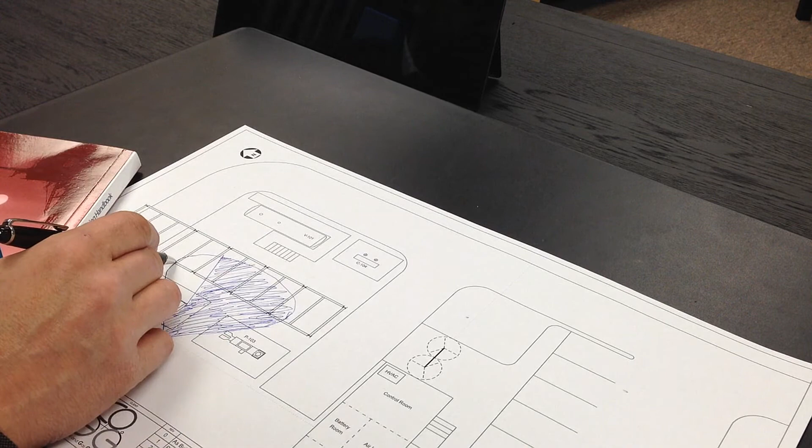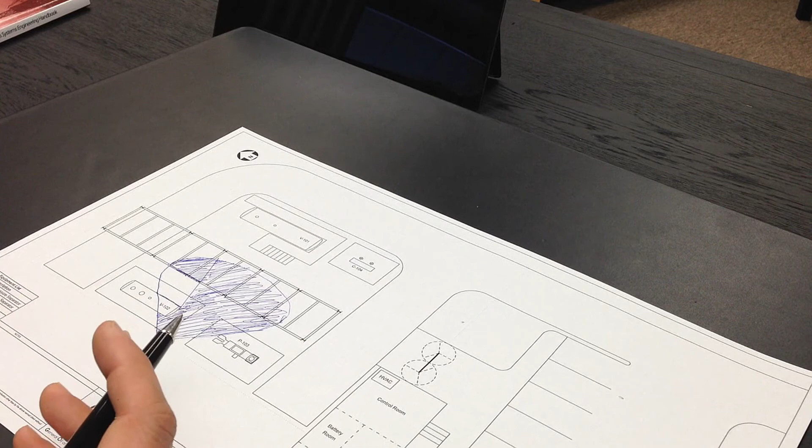Let's say that the distance is here. Again, it would be more of a straight line, and then we could possibly say that, okay, this area is also going to be covered, trying to do a little tiny bit of simulation of 3 dimensions. Now, while this is done manually, some of the less sophisticated fire and gas mapping software essentially do exactly the same thing as I just discussed.

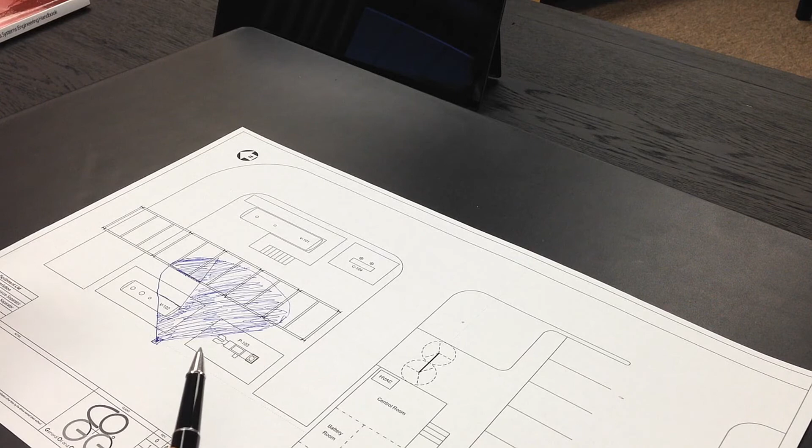Manual methods, again, are going to provide some degree of coverage calculation, but at the end of the day, you're still going to need to qualitatively assess, well, the shaded area here, what fraction of the entire covered area is that I've calculated? So as you can see, it's a little bit less than accurate, kind of time consuming, which is why most people that perform fire and gas mapping go ahead and use fire and gas mapping software for this task.

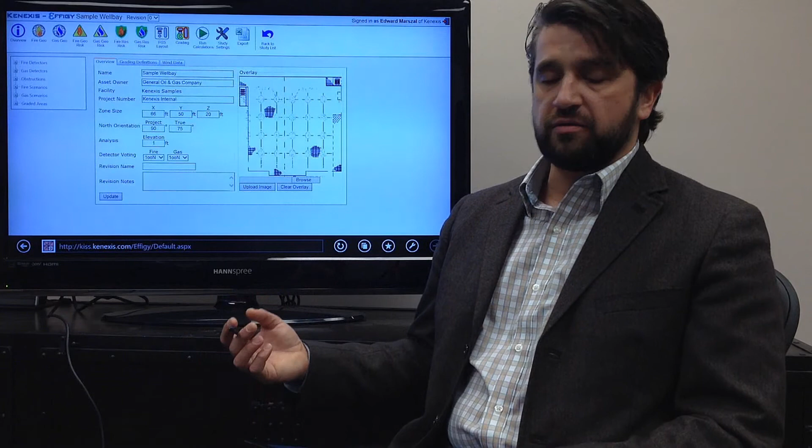In fire and gas mapping exercises, determination of the actual coverage that is achieved by different gas detection arrays is much more accurately done using fire and gas mapping software, such as the Kenexis Effigy software that's part of the Kenexis instrumented safeguard suite of software applications. So what you would want to do is to determine the level of detection that's available. What I've got here is just a sample well bay, 20 wells, 20 slots in the well bay, with each wellhead being a leak source, or a point where a leak can occur.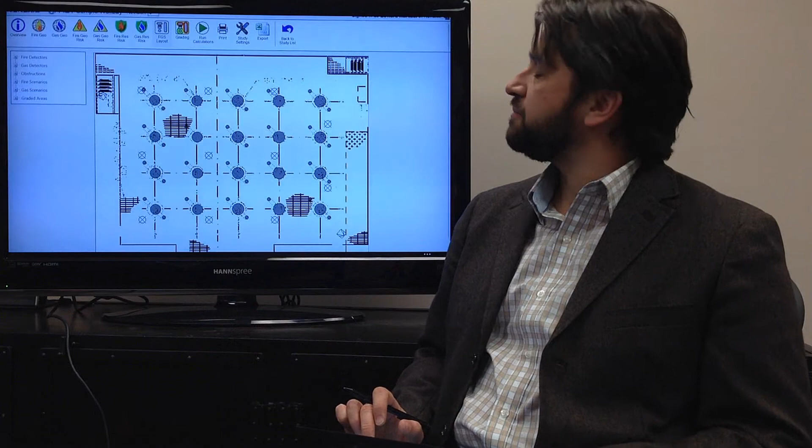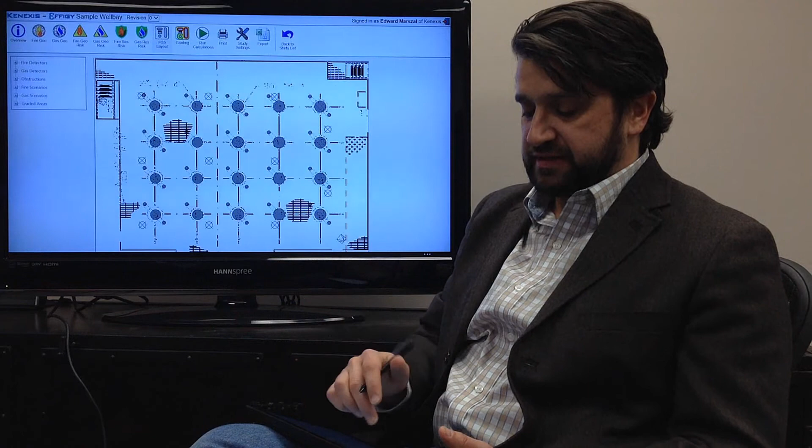If I could show you the layout. So this is the layout of the area. And if I can zoom in a little bit, you can see where all the gas detectors have been located, and you can also see in this location here an optical fire detector that covers the area in question. Now that's the gas detection layout, and all that equipment was placed just using a simple tabular approach. So here we have a couple of fire detectors, and here are the gas detectors that are included in the study that result in this particular layout.

And then we would simply run calculations to determine the different coverages. So you can see here the fire geographic coverage, again with the same key, with green meaning 2 or more detectors can see the area, yellow meaning only 1 detector, and red meaning that none of the detectors can see the area. And you can actually also see the different targets. So the zone as a total has 48% that is covered by 2 or more, 43% that is covered by at least 1. Totaling both of those together is going to give you a coverage greater than 90% for fire detection.

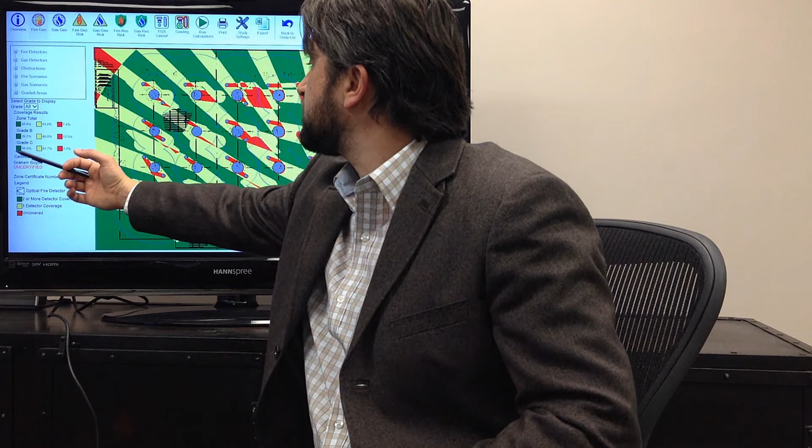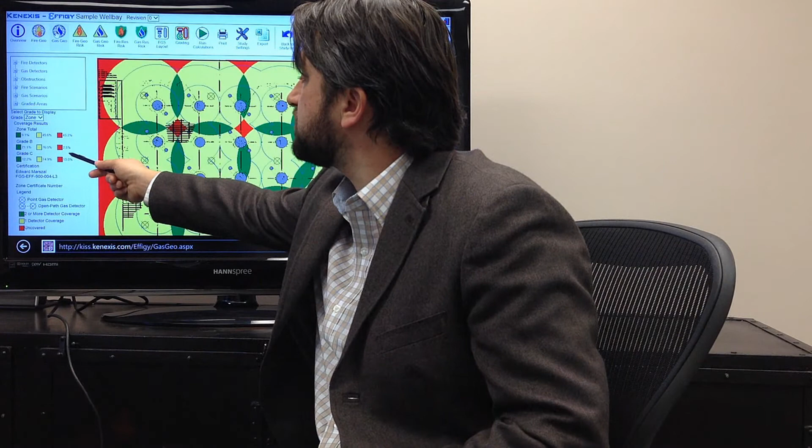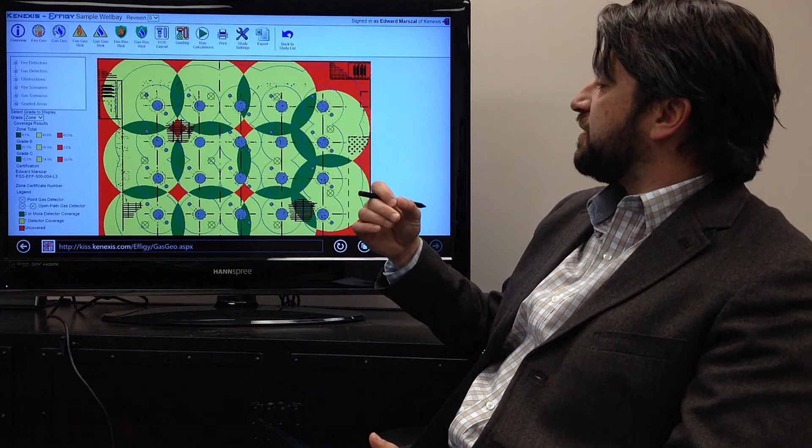And we can even look at different zones individually. So if I wanted only to see the zones that are graded B, we're able to show you that coverage also. Gas detector coverage is going to be shown in a similar fashion, both with the tabular results and also the geographic map that you can look at in order to determine whether or not your coverage targets have been met. And then if they are not met, you have a little bit more information to determine, well, where are my weak points? Where do I need to put more detectors?

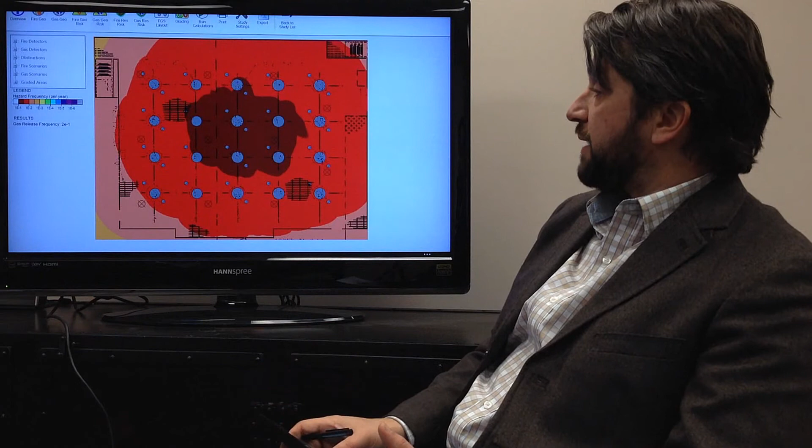With regards to scenario coverage, we would want to look at, let's just say, gas geographic risk. Again, here for a well bay, the risk is relatively high, right there in the middle of the well bay. And again, using my experience to look at this, the wind conditions are pretty evenly distributed.

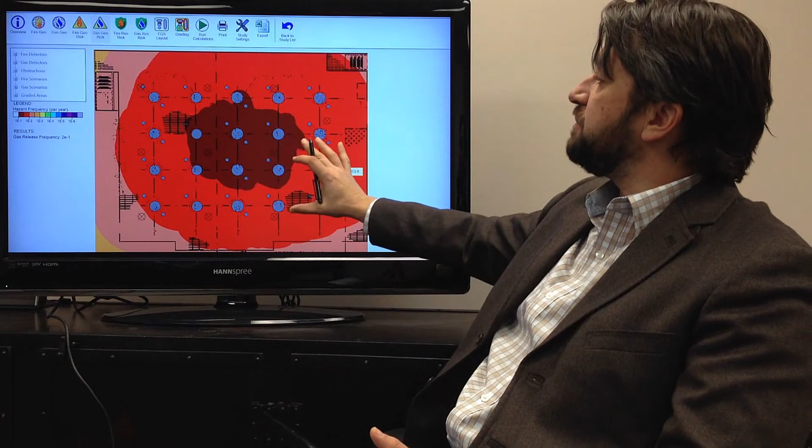You're not seeing a lot more wind from one direction than another, so fairly well distributed wind. So right in the middle of the module is where we expect to see the highest frequency of gas releases. And again, this is unmitigated. It does not consider the beneficial effect of the detection equipment.

So if this wellhead were to have a release in this direction, that would not be detected by any of these detectors. And in this particular case, those would have gone off the platform and wouldn't form that great of a risk. But in any case, that's how these things are determined.

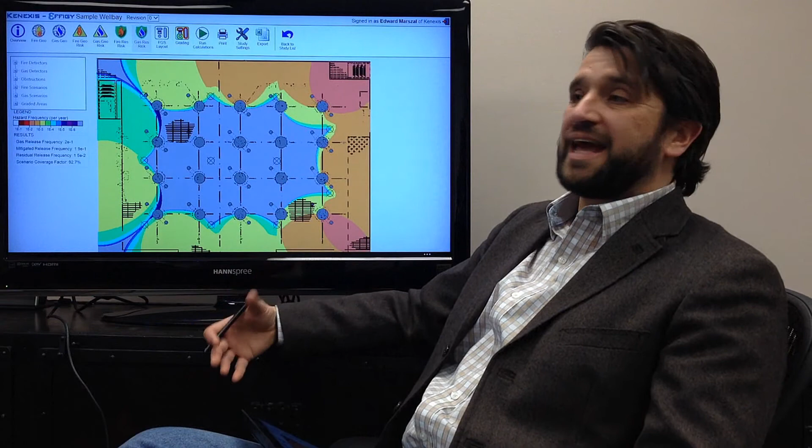Okay, so this is an example of the type of software that you would use to perform these coverage calculations. And specifically, we're looking at Effigy, which we believe to be the most sophisticated modeling package available for doing this type of work.

After verifying that the coverage targets have been achieved, the next step in the safety life cycle is verifying that the safety availability has been achieved. The safety availability calculation is nearly identical to the probability of failure on demand calculations that would be required to be performed for any safety instrumented function that is designed in accordance with the IEC 61511 ISA 84 standard.

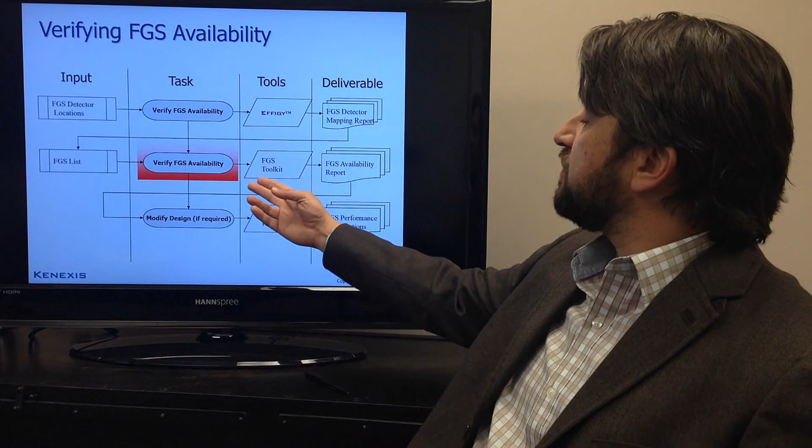So you'll start with a list of functions that you have, and you'll perform your FGS availability using either some sort of software tool, spreadsheets, even hand calculations, and the result of the task would be a reporting for every FGS function of what safety availability it achieved and a comparison of that against the performance target. There are a number of factors that are going to impact the safety availability that can be achieved by an FGS function.

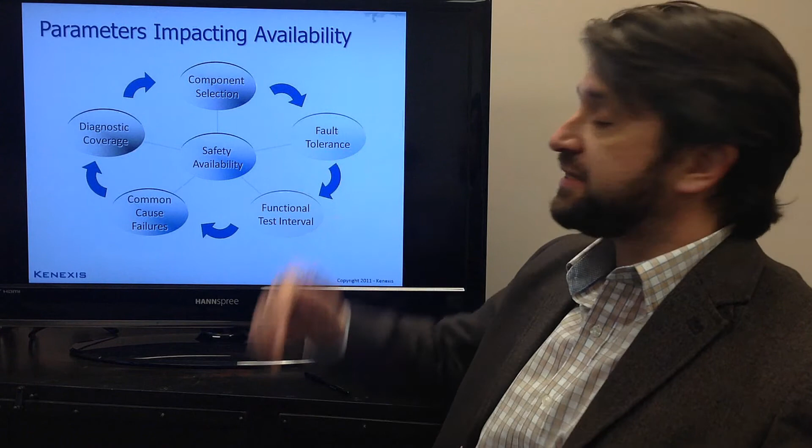Starting with the type of component. Each component is going to have its own failure characteristics in terms of overall failure rate, safe versus dangerous distribution, and diagnostic coverage of different types of failures. Then you're going to need to consider the degree of fault tolerance. So what type of voting arrangement are you using, and what type of fault tolerance is built into the equipment itself? What type of redundancy do the equipment items contain internally?

The next thing would be the functional test interval. The more frequently a device is tested, the shorter the duration that that device remains in the dangerous or failed state, which decreases its overall probability of failure on demand. We're also going to want to consider common cause failures in our analysis, or a single failure that can cause multiple redundant components to fail at the same time for the same reason.

And also, I've alluded to this already, you're going to want to consider diagnostic coverage in your calculations. A lot of FGS instrumentation specifically is built with a lot of internal diagnostics that can diagnose failures while the instrument is in operation without a manual functional test being required to perform that assessment.

So when all of these factors are considered using anything from a hand calculation all the way through the most sophisticated software, you'll end up with a calculation of probability of failure on demand, which can easily be converted over to safety availability, which is the target that is prescribed in the ISA 84.00.07 technical report, where SIL verification calculations or safety availability calculations are required.

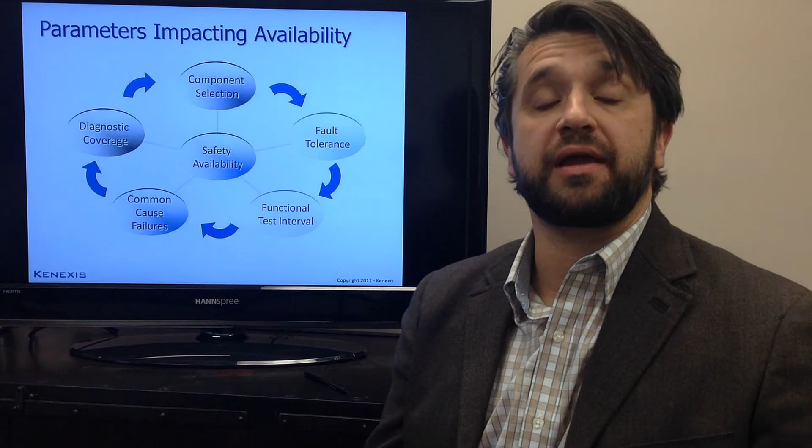The balance of the FGS safety life cycle is very similar to any other safety instrumented system design project, or any other control system design project for that matter. It begins with detailed design and specifications. These are going to include things like loop sheets, wiring diagrams, cable schedules, and even PLC programming.

Nailing down the details of what equipment is going to be installed, how it is going to be installed, and making sure that it is configured and programmed. The next step would be the development of procedures for how you interact with the system that is going to be built.

So that's going to include operation procedures. So for a fire and gas system, operation procedures would be things like, how do we start it up? How do we acknowledge alarms? How do we reset trip actions that have occurred? How do we put something into bypass so that we can do maintenance on it?

We're also going to need procedures for how do you respond to a detected or a revealed, a diagnosed failure of the fire and gas system. And then we'll also need to write procedures for maintenance activities and the periodic proof testing that is going to need to occur on the system and its sensors.

The next step would be actually building the system, construction, installation, and commissioning. In this phase, you're going to need to actually select, requisition, and purchase the actual devices that you're going to use. You'll need to take all of these devices and install them at the site and connect the wiring together.

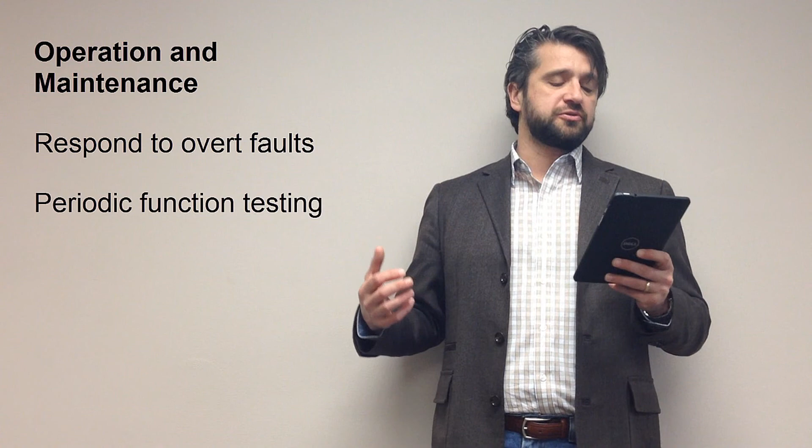But if the need calls, we want to make sure that the equipment is capable of performing its actions. So in order to do that, during the operation and maintenance phase, we will be responding to overt faults and then also doing some periodic function testing.

And then finally, the last step is management of change. And now management of change is an interesting topic for fire and gas systems because it is so pervasive. As you can imagine based on our discussions, the coverage that's achieved by a fire and gas detector array is very, very dependent on the physical layout of the plant. So anything that changes the physical layout of the plant is going to change the coverage.

That could be something as big as adding a new compressor or a new pump, or something as small and seemingly insignificant as erecting some scaffolding. All of these changes are going to alter the coverage that's achieved. And what coverage is actually achieved is something that you're going to need to know during that management of change process to determine if the change can be made safely while still achieving tolerable risk.

And with that, we come to the end of our presentation. I hope that you found this presentation to be educational and useful.